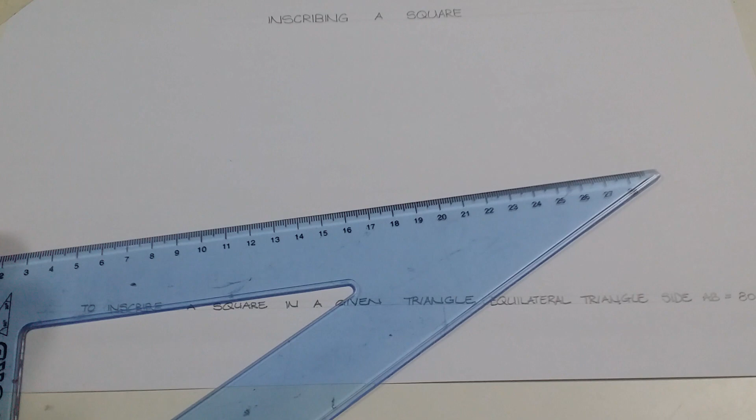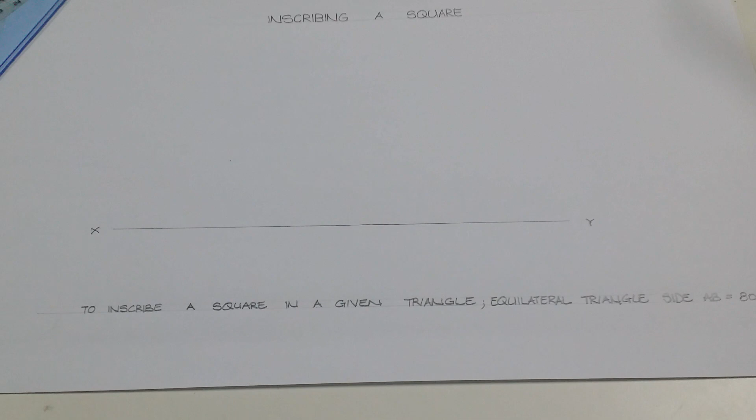We commence with our horizontal construction line. And we are going to let that horizontal construction line be any length of your choice and labeled X, Y. Then we establish our radius of 80 millimeters or 8 centimeters. They're both equivalent. So compass point goes at the 8 centimeter mark, or the equivalent 80 millimeters, and the 0 millimeter or centimeter mark on your ruler or set square.

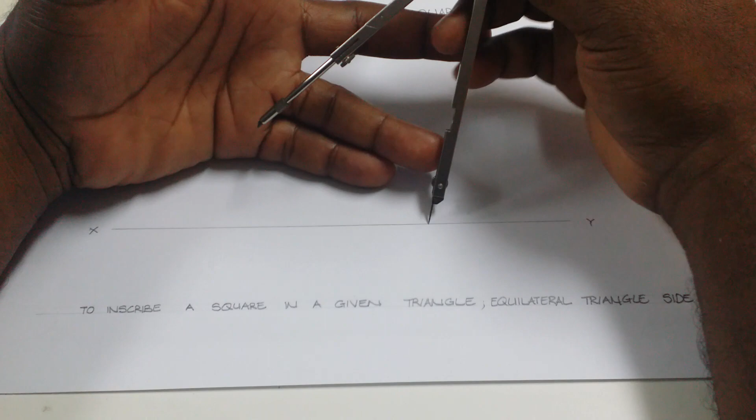Conveniently locate our point of intersection A. Go to point A as our center and construct our second arc. We can continue with the arc above point A, and so we go to that point of intersection on our line segment AY and label that point B.

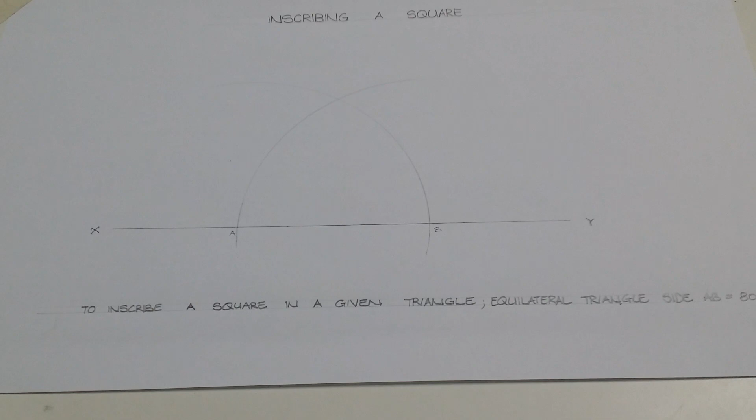And we can continue here with that arc inscribed from point B as our center and point A, pencil point location, to intersect with the major arc inscribed from point A. I am darkening the arc so that we can see it. However, just one movement of the compass over your drawing sheet would be sufficient to give you the necessary construction line.

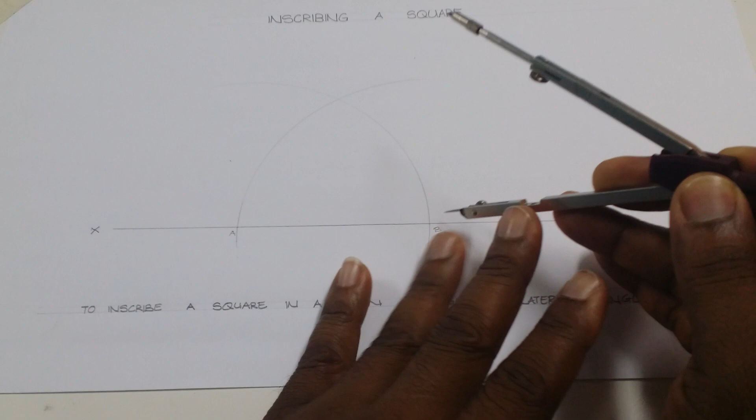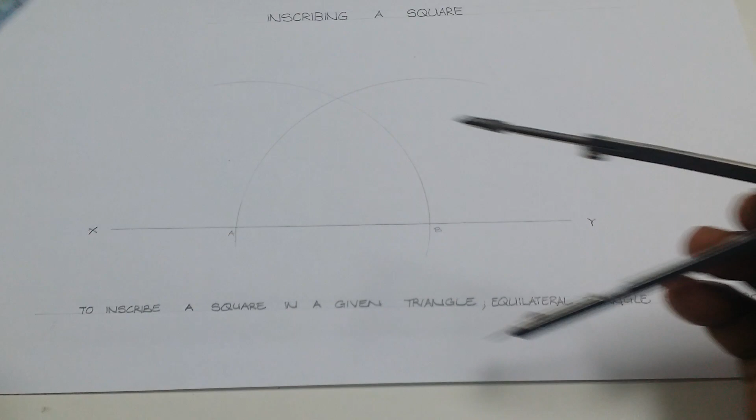It is important to continue the arc way above point A, and I want to darken that part of my arc above point A, and later you would see how important this is. By doing so, you are allowing your working to give you what I call two birds at one strike.

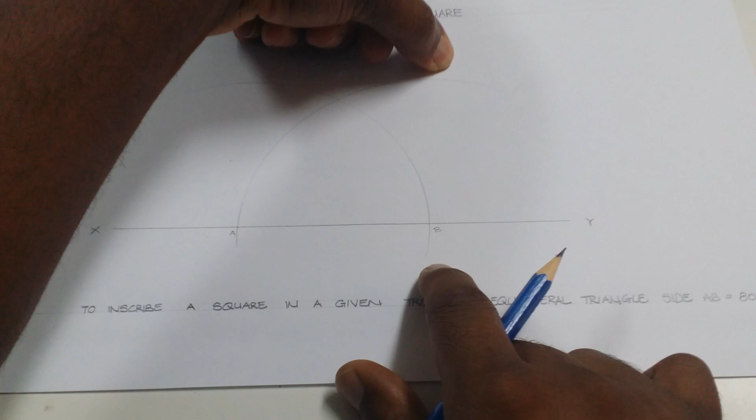Your perpendicular line, when constructed at point A, will automatically intersect that arc, giving you the points for your square on your line from point A and point B. Hence the reason we extend our arc and focus not just on the point of intersection but above point A and point B. We continue with the construction of our perpendicular line. That is going to be done at points A and point B as indicated earlier.

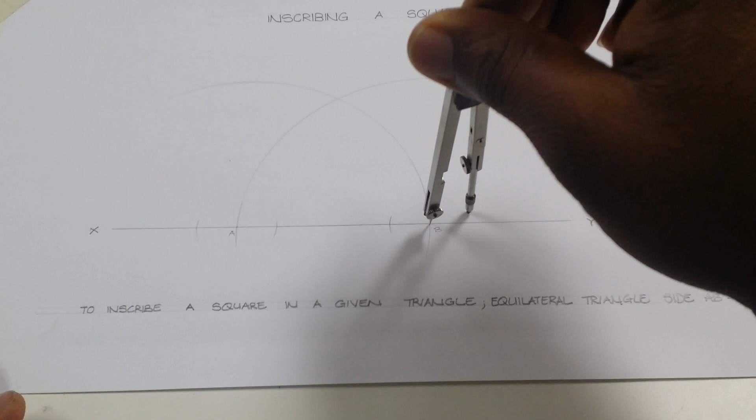A convenient radius of your choice selected, and your arcs inscribed on our line segment AX and also on our line segment AB. We do the same at point B and on our line segment BY. These two arcs give us the points 1 and 2. Using point 1 and point 2 as our center and our radius distance 1, 2.

We are now going to inscribe an arc. Okay, we could do it above. That's alright. Just don't focus on the intersection here, but rather the one that is now going to be done with the inscribed arc from point 2. The same at point 1. I'm going to try this time not to allow it to intersect with our arc drawn from point B.

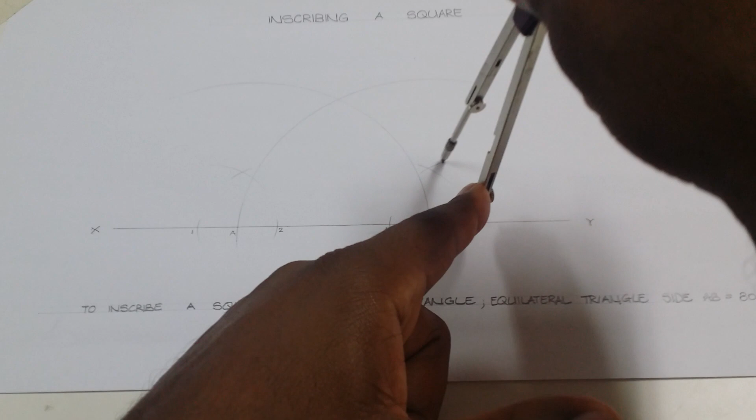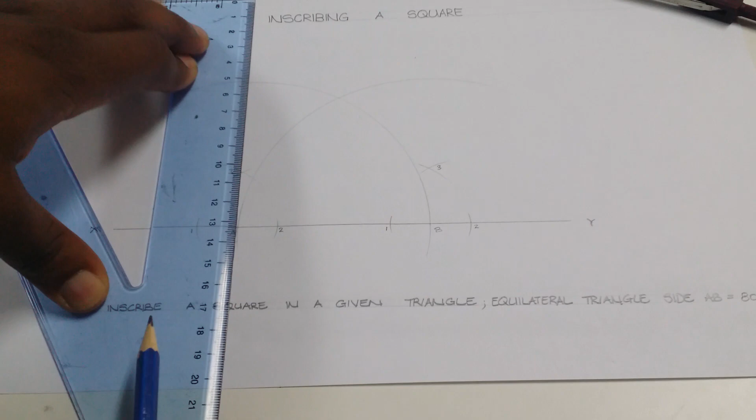Then you move to point 2 using the same radius and you inscribe your second arc. These two arcs intersect each other, giving us point 3. And we continue with our vertical line. You draw that line from point A through point 3 and intersecting with the arc from point B. Alright, so we go like this, and we do the same at point B.

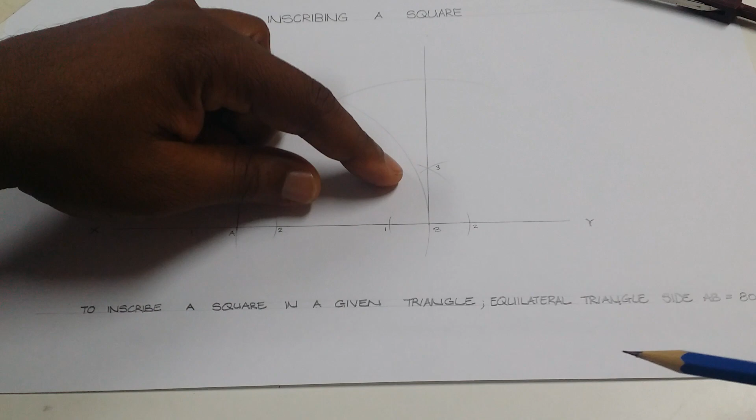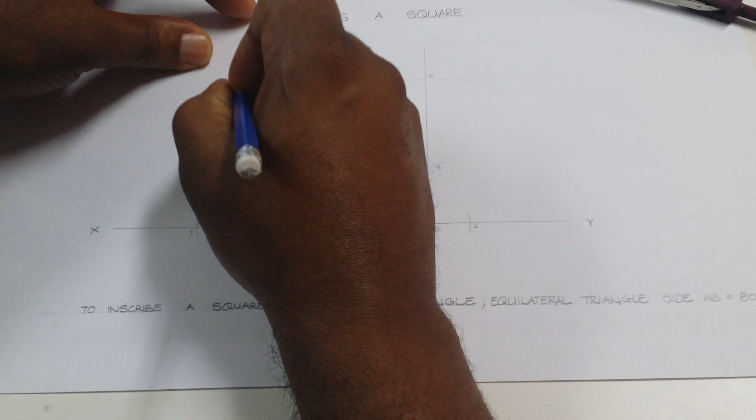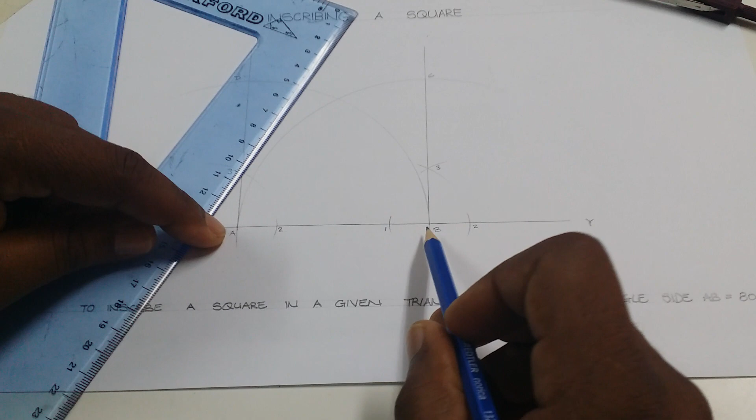From point B through point 3 and the arc drawn or inscribed from point A. That's this arc right there. This line extended through point 3 gives us our points C and D. Having found points C and D, we then move to the next step, the construction of our triangle. Point A is found at the base, B on this side, and points C and D at the top.

We go down, we join C and D, and then we label the apex of our triangle. The apex of our triangle, let's label that E. Now we move, remember we're working with construction lines, and so our object lines ought to stand out. We complete our triangle by joining E to A.

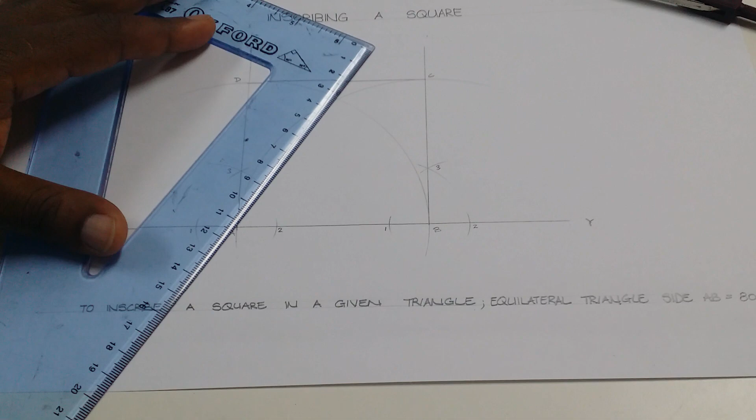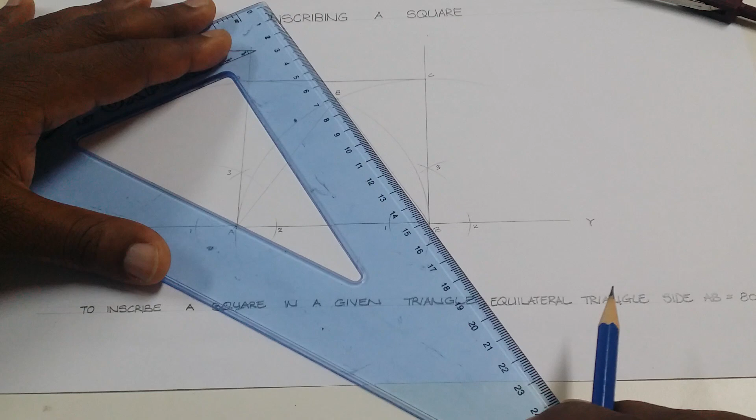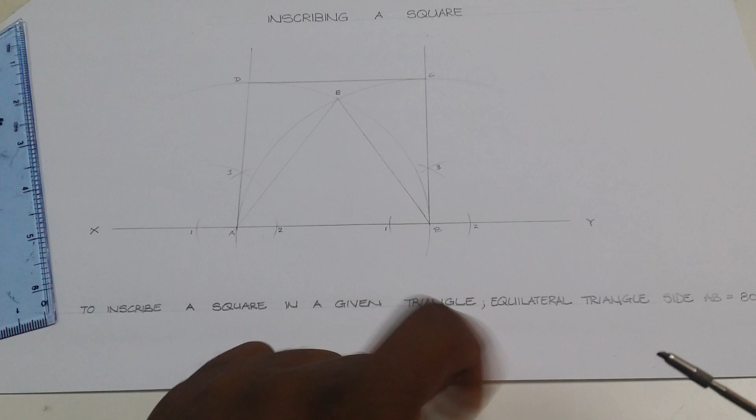And E to B, hence forming our triangle ABE. Our next step would be to construct a perpendicular line at point E onto line AB, or that line XY, so our line segment AB or our line XY.

We could do that, or we could just bisect the angle at the apex. It is easier to bisect the angle at the apex because we don't have to worry about getting a long arc, which would be the method for constructing a line perpendicular to another at a point away from that line. Alright? And so let's just bisect our angle at the apex, and that angle should be 60 degrees.

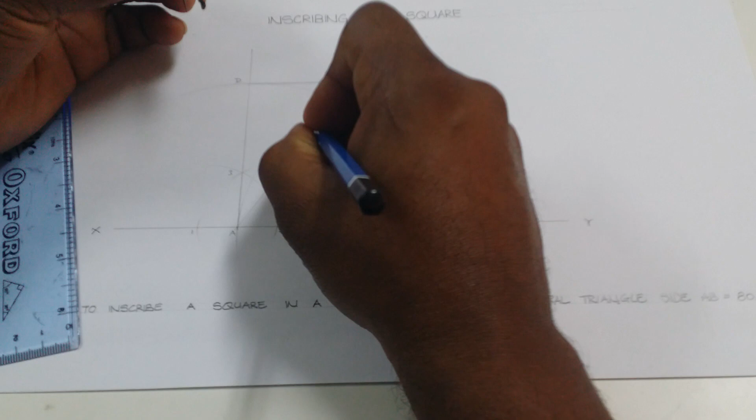This major arc intersects our line AE at point 1 and EB at point 2. Using points 1 and 2 as our center and our radius, anything of our choice, or we can keep that same radius, we inscribe our arc inside the angle to be bisected.

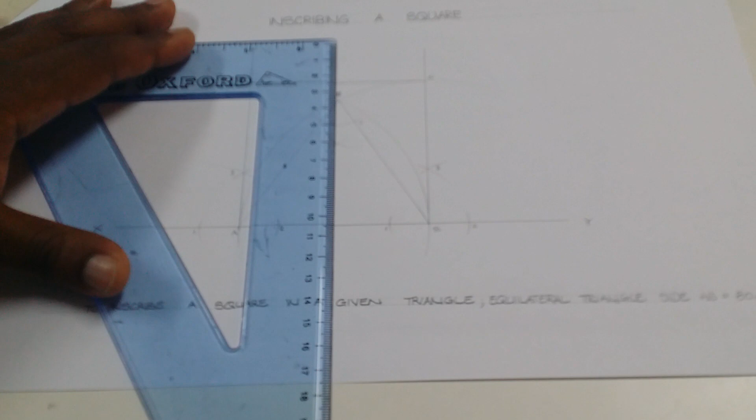Both methods, the construction of a perpendicular line at a point away from a line, and that line in question would be your line XY, and the point in question, point E, will produce a 90-degree angle along the line XY, and likewise bisecting that 60-degree angle will produce that perpendicular line onto our line XY, which is also at 90 degrees. If we bisect the 60-degree angle at our equilateral triangle, we will arrive with 30 degrees, 90 degrees, and 60 degrees all in one triangle.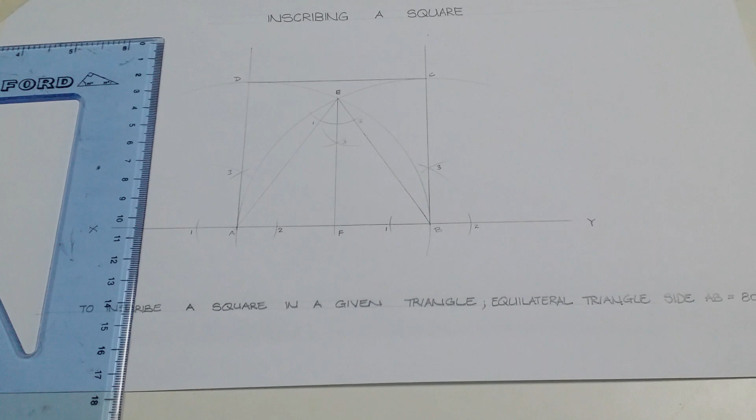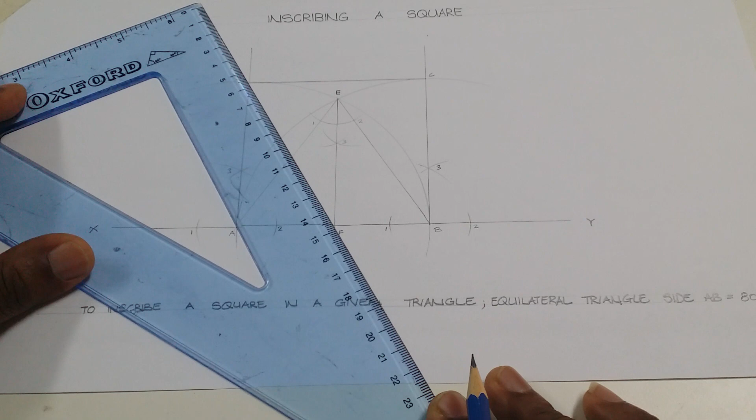And so we draw a line through our third point, and that intersects our line segment AB at point F. Using point F as our center, we then proceed to join point D to F, or not our center but our focus. We join point D to F, and we now join point C to F.

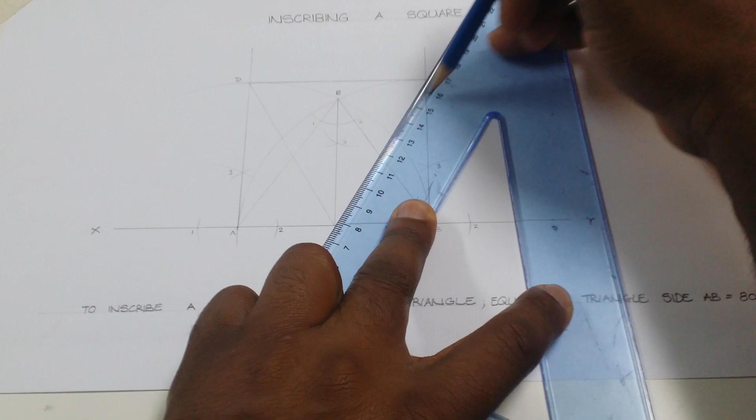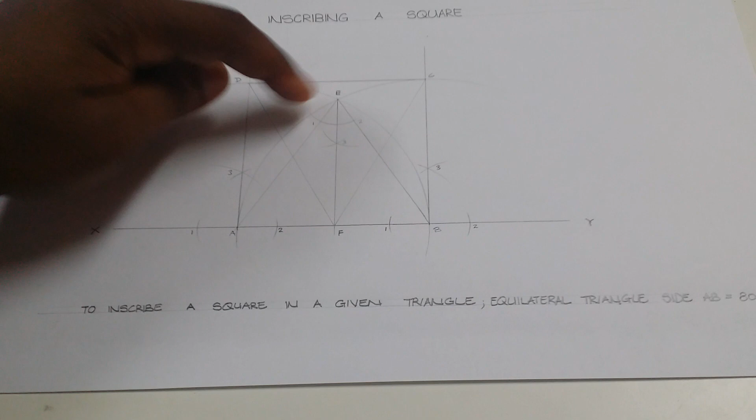Again, you want to bring that ruler as close as possible, and that will depend on how sharp your pencil point is. And then you draw your line joining point F to point C. These two lines, line DF and CF, intersect at point G and point H. The first side of our required square. We proceed by joining point G and point H, as close as possible and as straight as can be.

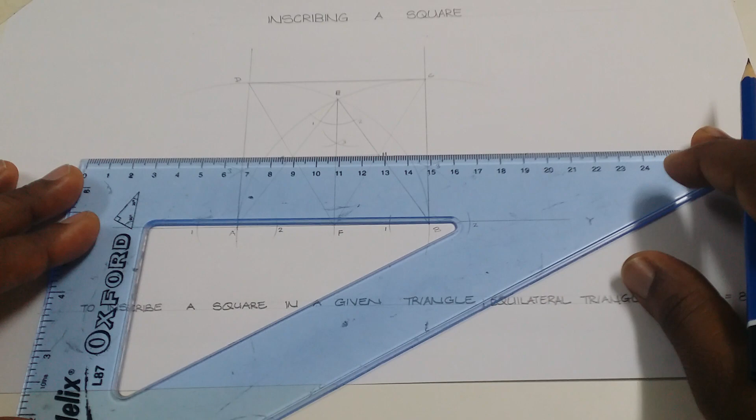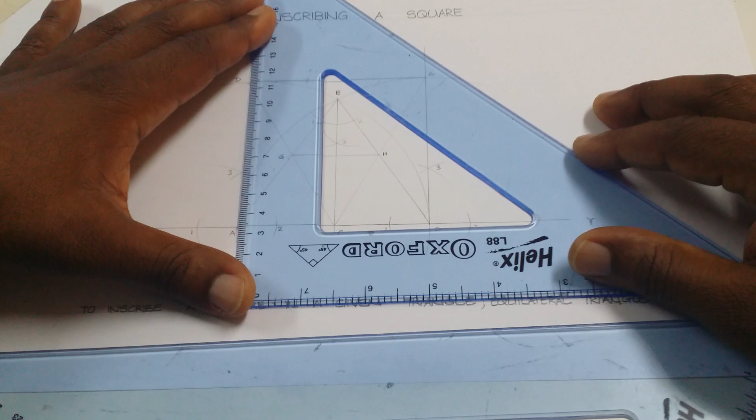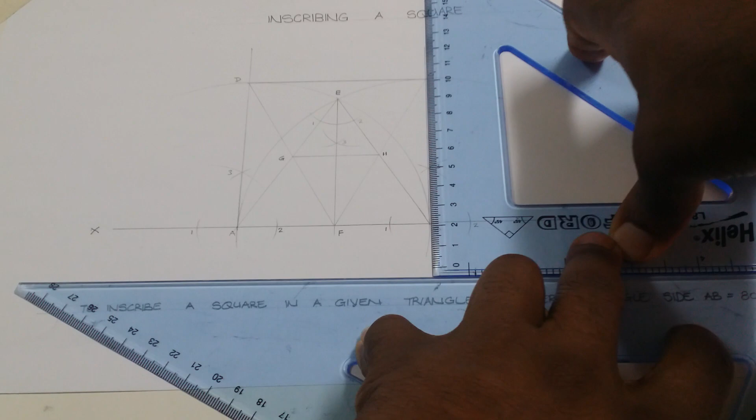And then we use parallel lines as shown previously in the video with inscribing a square in a semicircle. We align our set square with our reference line AD. We could also use AC as our reference line. That's CB, sorry. Let's use CB as our reference line. Hold that set square in place. Slide your set square below in that position that will allow us to move this top set square, which has already been aligned with the reference line, in a direction towards the left of our drawing sheet to the points that are there.

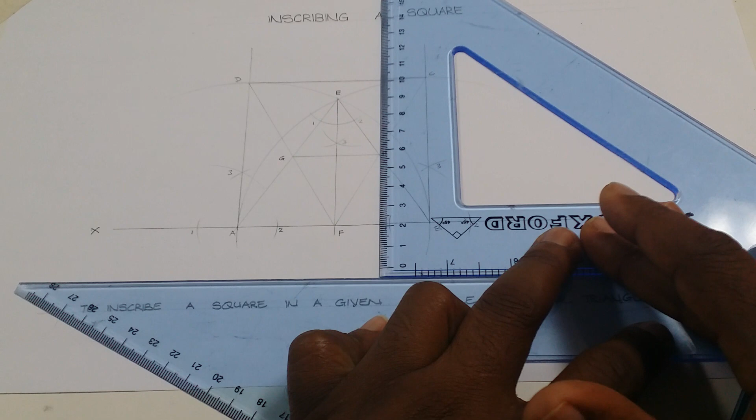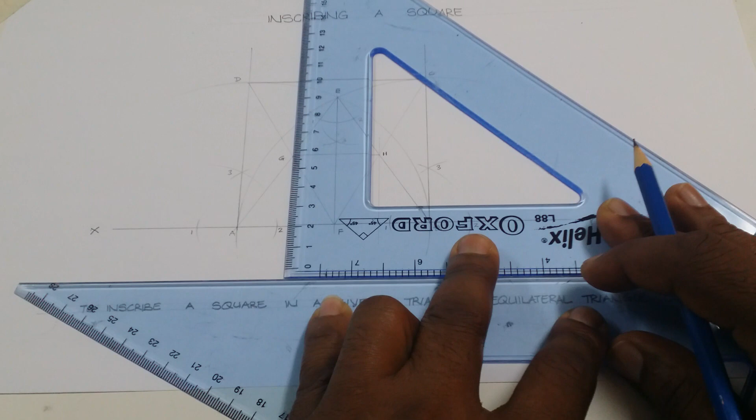And so we move. Of course, you want to apply pressure onto your set square at the bottom so it does not shift, and you gently slide the upper set square to point H. At point H, we are going to draw our line through point H onto our line segment FB, and then through point G onto our line segment AF. That gives us I and J.

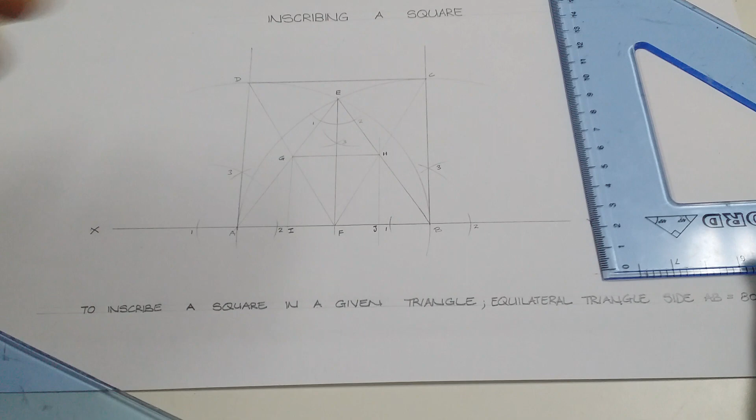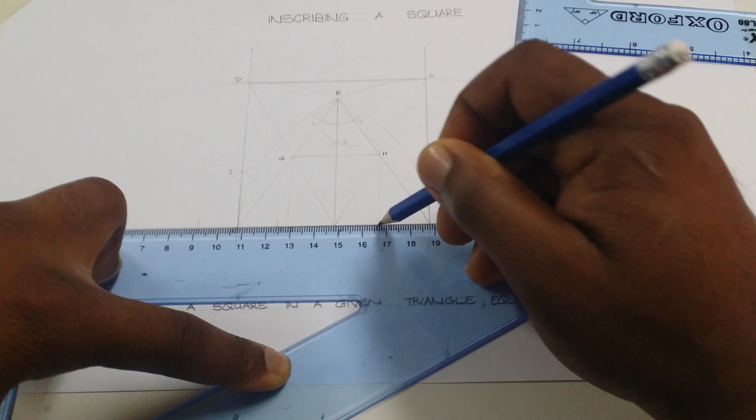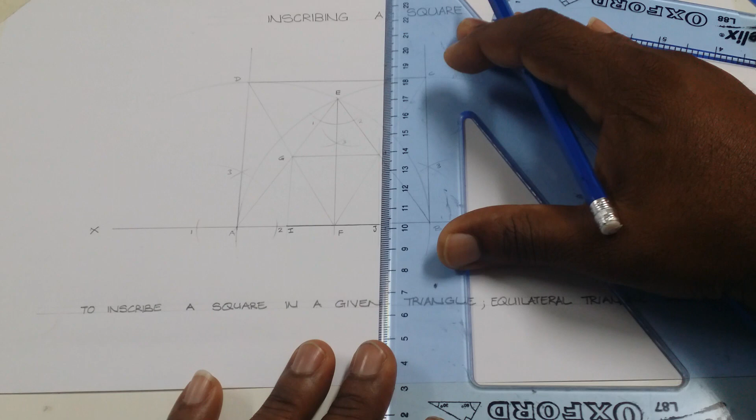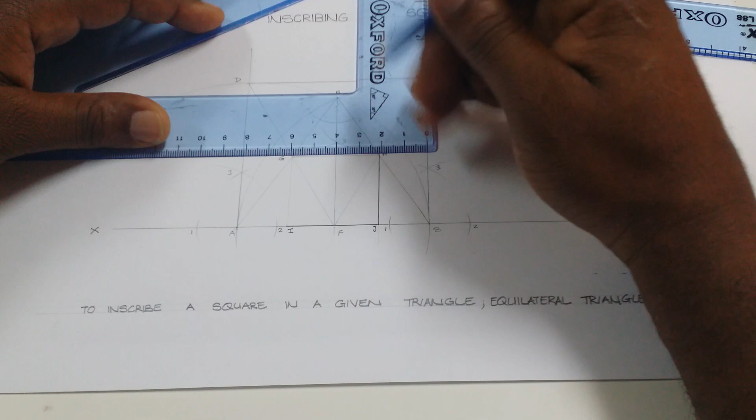Now that we have our required square constructed inside an equilateral triangle, we are now going to proceed with darkening the sides of our required square. So you darken your line segment IJ. You darken your line JH. Then you darken your line GH. Try as much as possible not to slide your set square over the object line. That might cause your drawing sheet to get a little bit untidy as the line smudges.

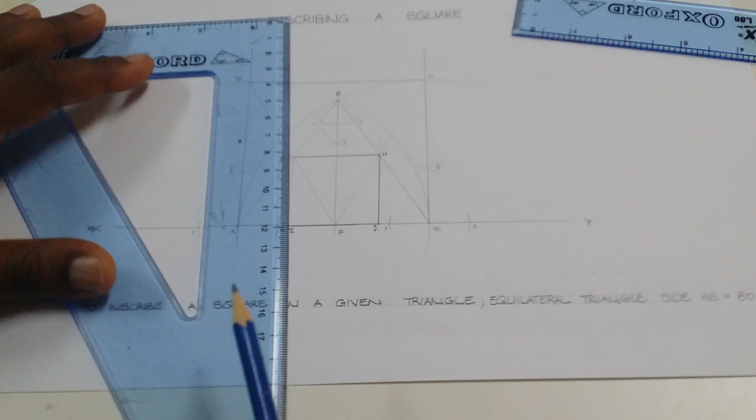And I just extended this line longer than I was supposed to. Something you need to be very careful of. Because it's an object line, after erasing it, it will begin to appear as a construction line. So we need not worry too much about that mess. And then we darken our line GI. With that done, we have now constructed a square inside a triangle, thus concluding the topic quadrilaterals.